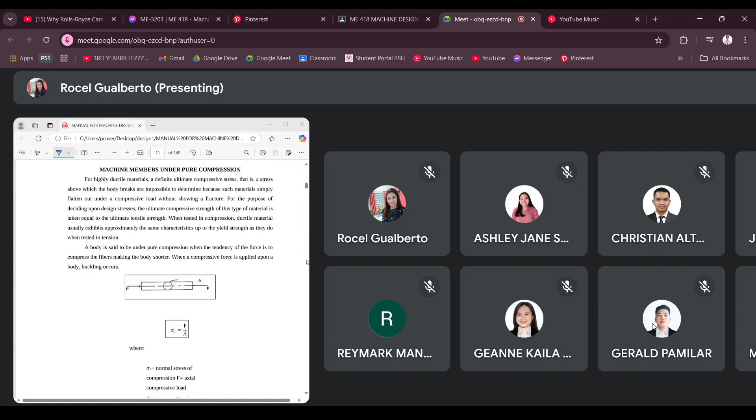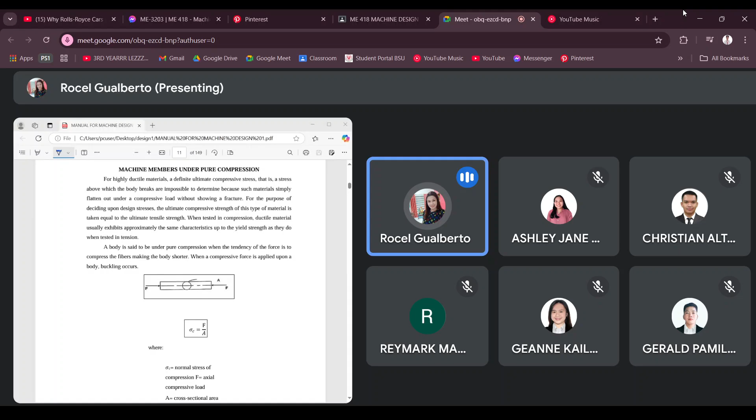Okay, so let us start with this one. So this time we are to design a member under a pure compression. So, kabaliktaran lang po ito nung sa tension. So, if you have there a compressive load, that tends to push your material. Yung una po, it tends to pull your material, resulting to an elongation. This time naman, ipupush po natin. So, what is basically the difference between designing this member kumpara doon sa nauna natin na topic?

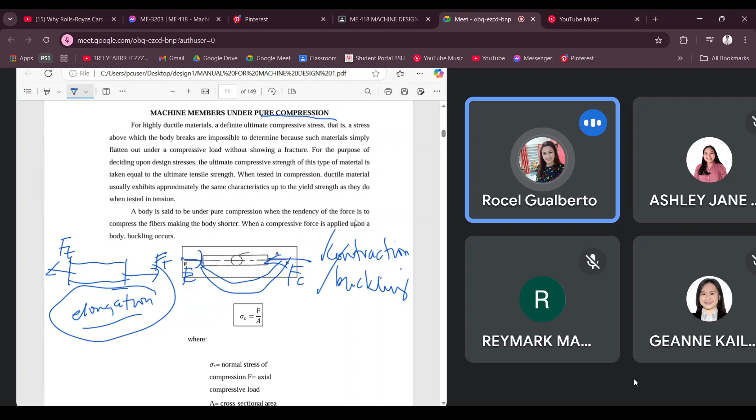Okay, so para malaman yon, you have here the criteria for design. The criteria for design is L divided by K and we call that the slenderness ratio. L is the original length of the material or the specimen. And the value of K is simply the square root of I over the area. I is the moment of inertia and A pertains to the cross-sectional area. So you have to derive the value of K, the least radius of gyration, coming from this equation.

Say for example, you have there a round or circular cross-section. For a circular cross-section, I is equal to pi d to the fourth divided by 64, and A pertains to pi d squared over 4. So these are the values of I and A. So kindly recall po yung mga value ng I. Yan po ay na-discuss during your MDB, Mechanics of Deformable Bodies.

So you try to recall po ano ba yung values ng I, moment of inertia. Ito po yung value natin. And having these values now, isa-substitute po natin sa equation ng K. K is equal to the square root of pi d to the fourth over 64 divided by pi d squared over 4. So, yan po yung ating equation.

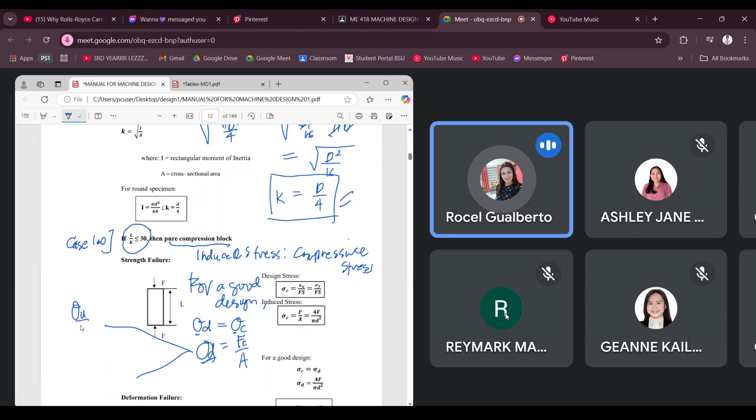What is the value of this design stress? The design stress can be written as sigma U over factor of safety, or it can also be sigma Y over factor of safety, depending upon the basis of design.

If the basis of design is the ultimate strength, that's the one to use. But if the basis of design is the yield strength, then we use sigma Y over factor of safety. That's what we'll use. You equate the design stress to the induced stress of the material.

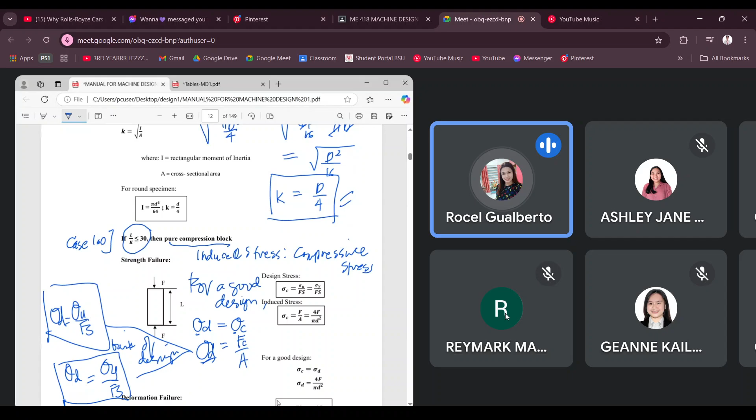So where is the dimension we're looking for? It could be on the area. If it's circular, then FC over pi d squared over 4 equal to your sigma d. So here is the dimension, here is what we need.

That is how you decide based on the strength failure, and that gives you the dimension. That is the strength failure. But then we also have what we call the deformation failure.

Now, how do we know if there's a deformation failure? You are given the allowable limit of deformation. For example, it's said that the member shall not contract more than this value. So the value given is called the allowable limit of deformation.

And what do we do when there's an allowable limit of deformation? For a good design, you equate the allowable limit of deformation to the computed value, which is FL over AE. This would be your FC. And then from the area, you solve for a dimension.

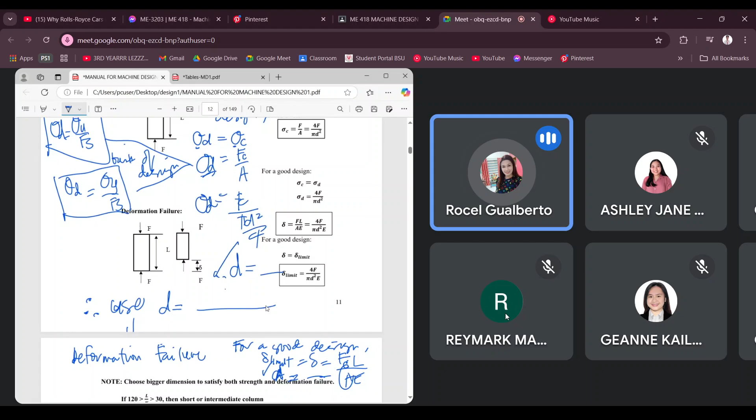So what would be your resulting dimension? You need to compare the diameter using the strength failure, and this is also a dimension considering the deformation failure. You need to look at both, solve both, but they won't be equal. Therefore, which one do you use? You use the diameter which is the higher or the highest.

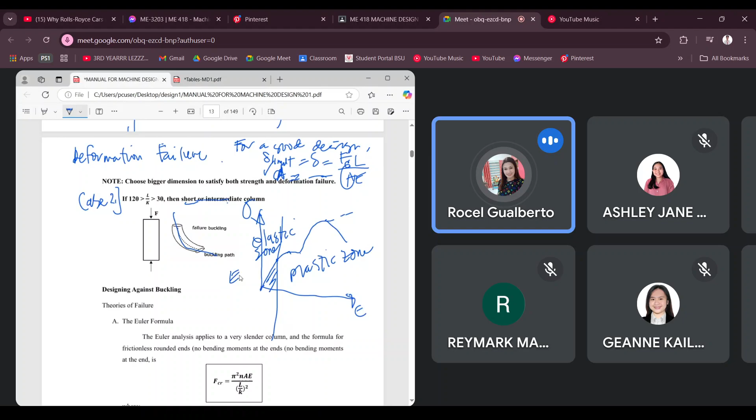In this elastic zone, this is governed by the Euler formula. Whereas the plastic zone is the opposite.

In the plastic zone, when you load the member with force, it will elongate. But once you remove the force used to compress it, it will not go back to its original dimension. It may recover slightly, but not totally eliminate all deformation like in the elastic zone. So in this part, we now have permanent deformation. That's the plastic zone.

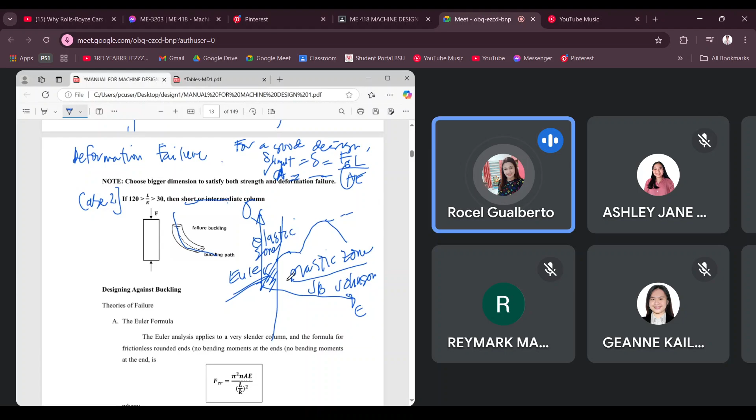As an example, the plastic zone is governed by the J.B. Johnson formula. So these two theories define the behavior of the material in the elastic and plastic zones.

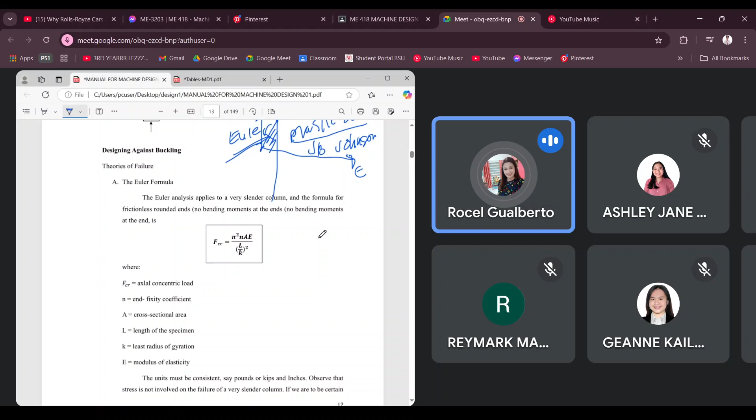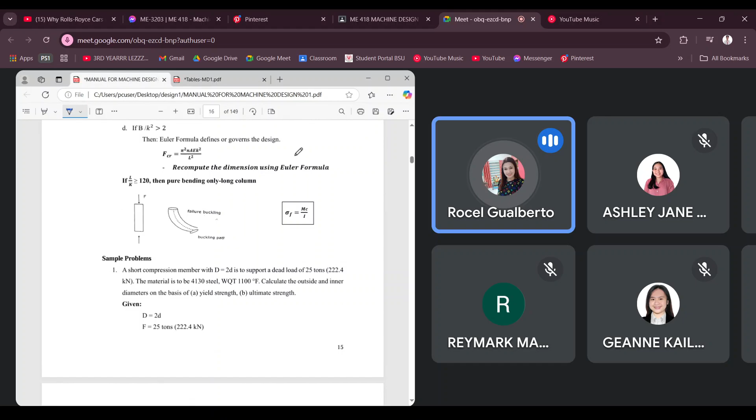Now, what are we going to design? Please look for the General Guide in Designing Buckling Failure, on page 15. So how is it stated? Compute the dimension by initially assuming that buckling failure occurs within the plastic zone.

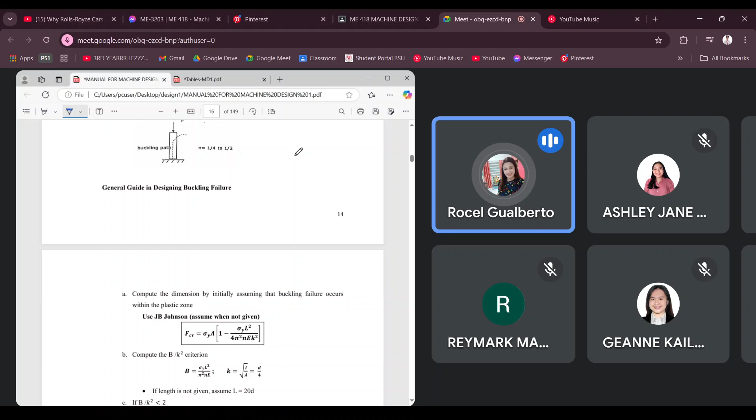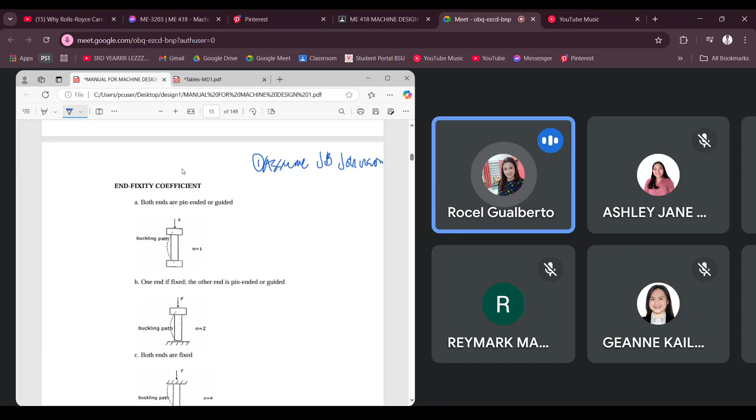So that's what you do first, to design: first assume to use J.B. Johnson. Assume that the member will use J.B. Johnson, meaning it would already have permanent deformation. That's our assumption — that the failure is in the plastic zone. So when you assume J.B. Johnson, that's why you use the J.B. Johnson formula.

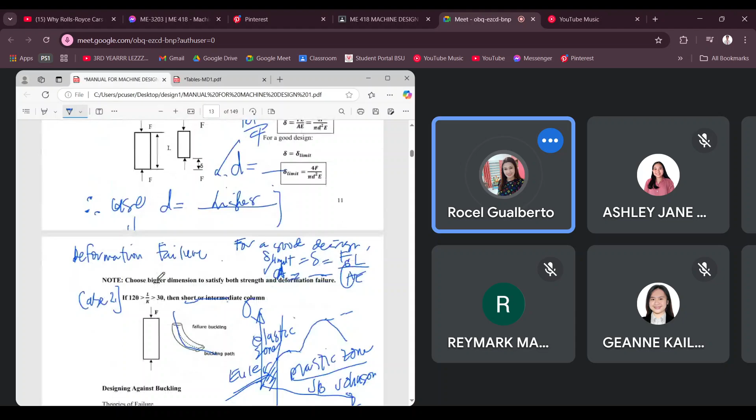F critical is equal to sigma y times A, times the quantity 1 minus sigma y L squared over 4 pi squared N E k squared. So this is our equation for the critical buckling load for J.B. Johnson.

So what do we need there? From this equation, you are able to solve for the dimension, which is in terms of the area. So that's where we get our dimension.

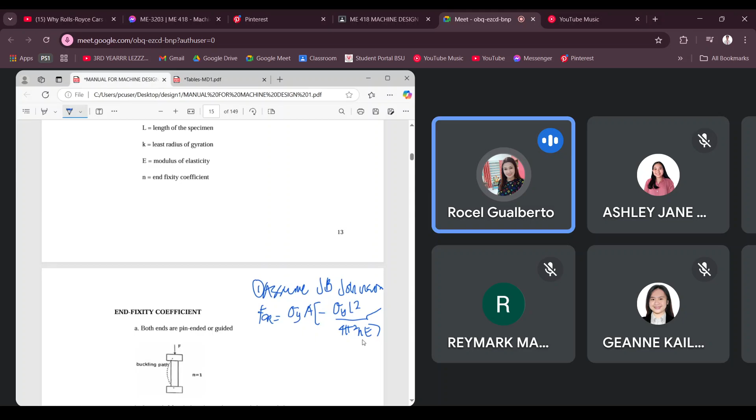Now, how do we solve this? Sigma y is taken from the table. As for the area, you can solve for that. You have length, which is also given. And then for pi, n, and e — e is called the modulus of elasticity.

And the n here is called the end fixity coefficient, and these are the values: n equal to 1, n equal to 2, n equal to 4, and n equal to 1, 3/4 to 5 over 12, or 1/4 to 1/2. So those are the values of n. We just choose depending on the conditions at both ends of the material.

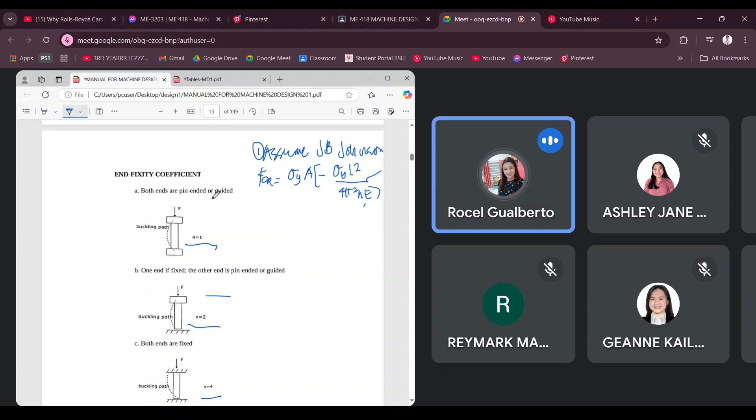So those are the values of n that we substitute into J.B. Johnson. You look at the buckling path, since its shape changes depending on the load we apply. So just look at the problem for what conditions of n are given. If none are given, you can assume both ends are pin-ended. That's how we get the value of n.

And e is the modulus of elasticity, which again comes from our table of properties. So the only thing left unknown is F critical.

Okay, so the critical buckling load, this is different po from FC. Yung pong ginamit natin sa case 1, that is FC po, that is the compressive load. Okay, pero ito po, FCR, tawag po dito is the critical buckling load. Buckling. Okay, so it's the critical buckling.

And to be solved using the equation FC times the factor of safety. Okay, so ganun mo po kukunin yung F critical. So using this equation, yung area po niyan, will make it simple, pi d squared over 4, kung siya ay circular. So galing sa equation na yon, you come up with ito lang: F critical equal to FC times the factor of safety.

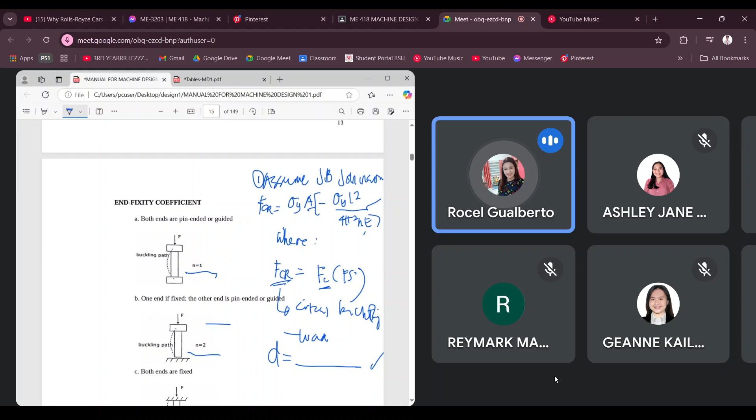So we started with an assumption using the JB Johnson. Tapos another assumption, ito gamit ni JB Johnson. Tapos we solve. So kailangan po yung nasagot po natin dito sa JB Johnson, kailangan po natin ma-check, kasi we simply started with an assumption. So paano ma-check kung tama? Ang ginagamit po natin is yung B over K squared criterion.

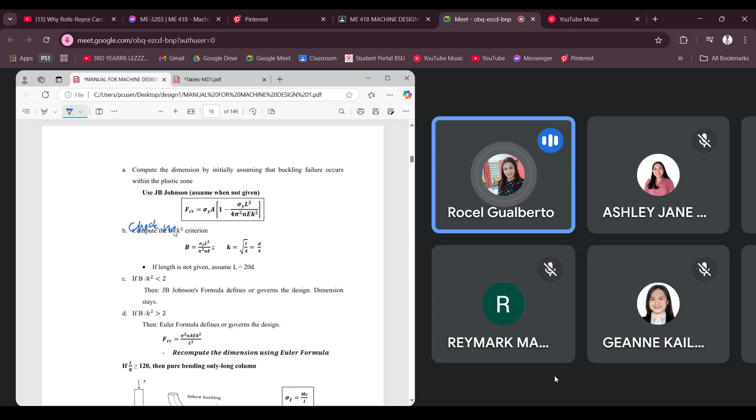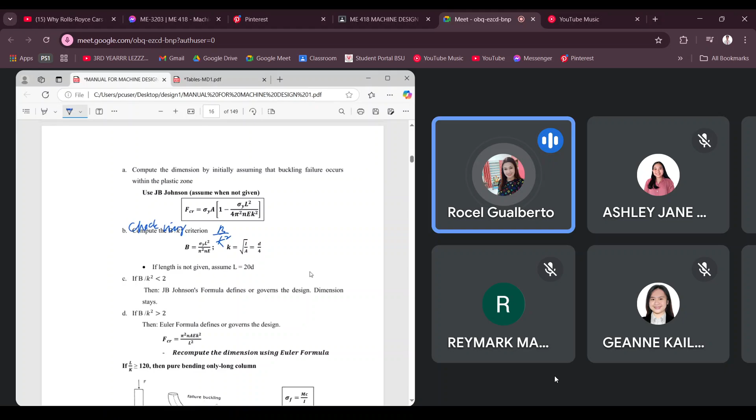Okay, so you have to check using B over K squared criterion. Okay, so yan po yung gagamitin natin na pang-check. So what is the value of B? Yung B po natin is equal to sigma y L squared over pi squared n E. And then you have there yung K, which is square root of I over A. So we have there K value, is equal to square root of I over the area.

And in case for a round specimen, as we have derived, you come up with D over 4, kung yan po ay round. So, ang gagawin nyo lang po, kung ano po yung mga values na ginamit po doon sa JB Johnson equation, yun din po ang ipapalit po natin. At yung pong na-solve po natin na diameter kanina, di po ba nag-solve tayo ng diameter or dimension using the JB Johnson?

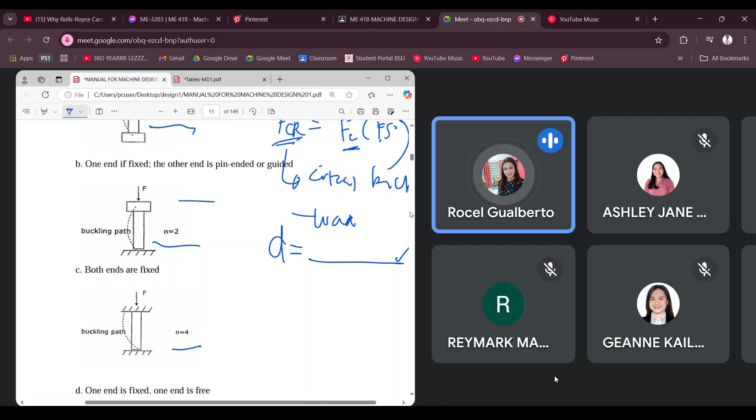Pag na-solve mo po yan, i-compare mo ngayon sa naging sagot po dito. What is then your value of the diameter? So what is your diameter? Galing po sa equation na ito. Now, yung diameter po na yan po yung isa-substitute dito. So, ibig sabihin makukuha mo po na B over K squared ay an exact value.

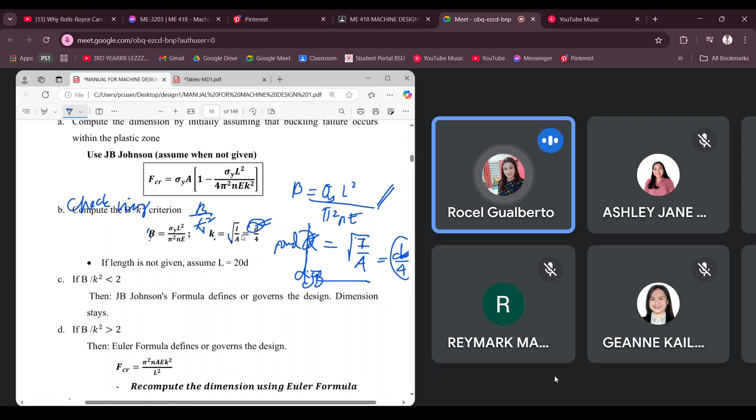Right? So, for example, yung sagot mo kanina using the JB Johnson, yun ang sa-substitute mo po dito. And then what would be the result? Ginagamit po ang B over K squared to test the value, to test your answer galing sa JB Johnson. So, ano yung mga pwedeng maging effect natin?

If B over K squared is less than 2, and the other one, if B over K squared is greater than 2. So, yan na po yung checking natin. Kapag po siya ay less than 2, then JB Johnson governs the design. Meaning, dimension stays. So, ibig sabihin yung sagot natin using the JB Johnson, tama po yun. This is our answer, kapag ang criterion B over K squared is less than 2.

But then, if B over K squared is greater than 2, then it would be Euler that governs the design. Meaning, ang failure po ay nasa elastic zone at wala sa plastic zone. So pag B over K squared ay greater than 2, ibig sabihin po yung sagot nyo using the JB Johnson, yun ay mali. So, mali po yun.

Ang gagawin mo ngayon ay magre-recompute ka. So, you need to recompute using the Euler formula. And this is the Euler formula: F critical is equal to pi squared N A E K squared over L squared.

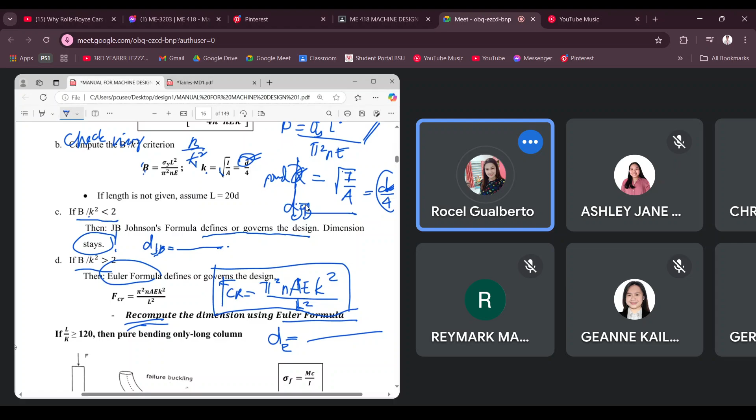Okay? And then the last one, we have here case 3. And, case 3 naman po if greater than 120. Okay, the slenderness ratio this time is greater than 120. Then we call it as a pure long column na po. Okay, and it experiences pure bending.

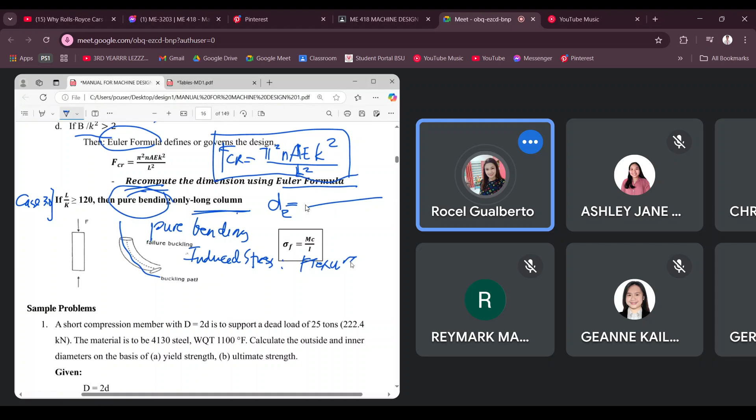And paano mo siya i-design? Okay, you equate. A good design, you equate the design stress with the induced stress, the flexural. The flexural stress, you have the equation Mc over I. Then, M pertains to the maximum moment. And then I is the moment of inertia.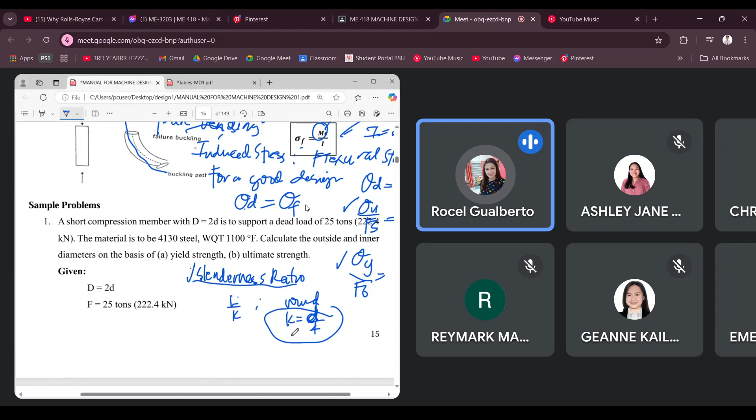So, you have your procedure on how to really design the compression member. Hindi dahil depende sa slenderness at hindi mo makuha ang slenderness, ay titigil na. So what is the procedure that you must apply? So anong gagawin mo? So you will start with an assumption. So ang una mong gagawin is to assume intermediate column. So yun po yung assumption. Assume intermediate column.

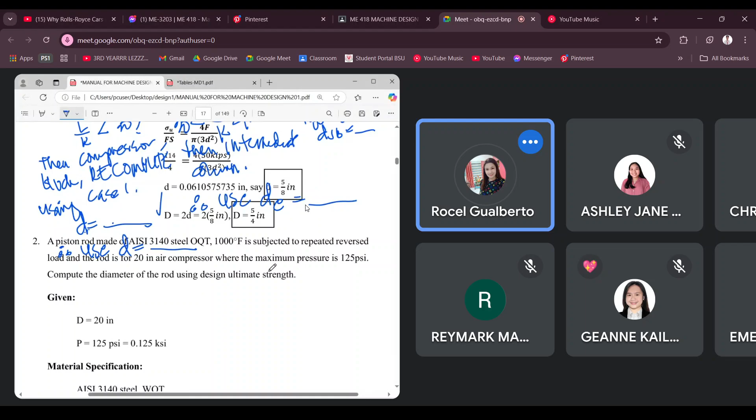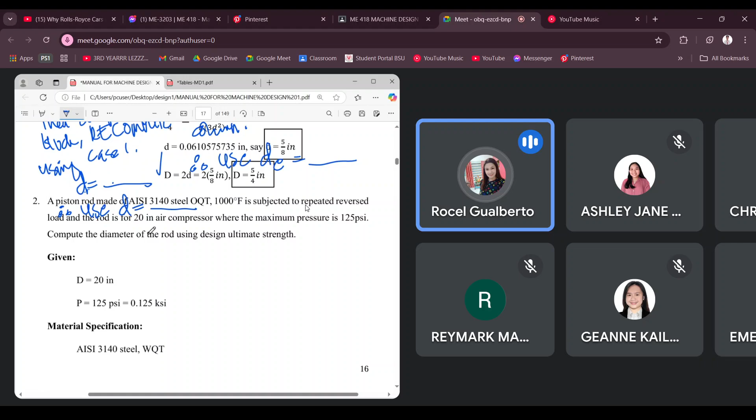Problem 2. Piston rod made of AISI 3140 steel OQT at 1000 degrees Fahrenheit is subjected to a repeated reverse load. And the rod is for a 20-inch air compressor where the maximum pressure is 125 psi. You compute the diameter of the rod using design ultimate strength. So, this is our illustration for the problem.

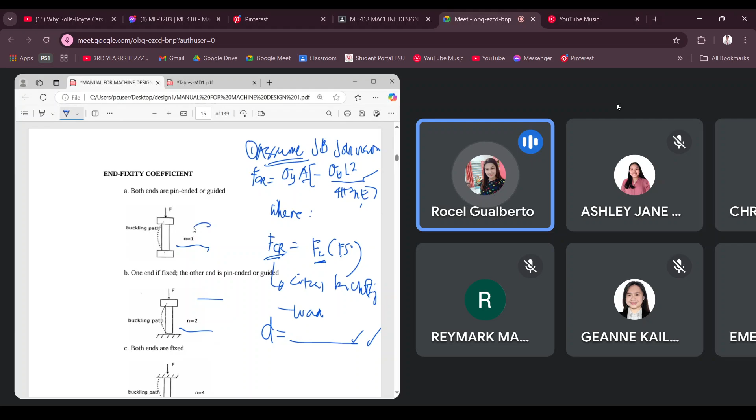Ano yung kulang? n, the end fixity coefficient. So, pili po tayo sa values ng n kanina. Kapag piston rod, yung taas po nakakabit dito sa piston, so it's pin-ended or guided. Yung ilalim naman niya, nakakabit po sa crankshaft, so nakapin din po siya doon sa baba. So both ends are pin-ended or guided, n equal to 1.

So, this is what we'll use, n equal to 1. Both ends are guided or pin-ended. N equal to 1. So, E, K, N equal to 1. So, what's left?

We've defined all of this, now for F critical. F critical is equal to FC times the factor of safety. The factor of safety equals 8. What about FC? FC is the compressive force. So, how do you solve for FC?

Sometimes that's given, but in this case you need to solve for it. Recall pressure: pressure is equal to force over area. That force is the compressive force, and this would be the area of the compressor. Therefore, FC would be the pressure multiplied by the area of the compressor.

This pressure is 125 PSI, area of the compressor is pi times diameter squared over 4. The given diameter of the cylinder is 20 inches. So, pi d squared over 4. What is the answer? Then convert that answer into KSI.

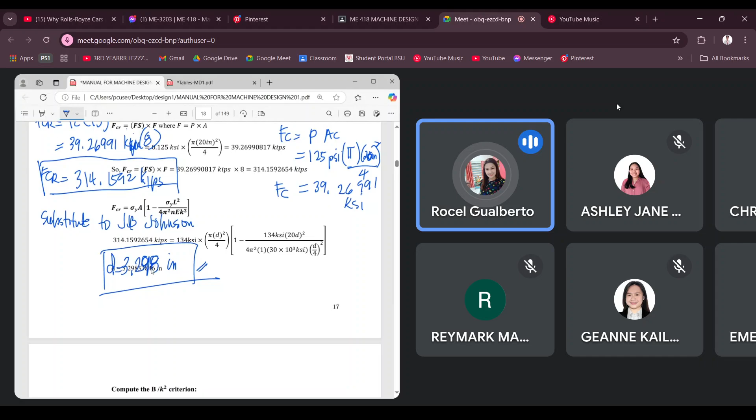Next, check that value, that answer. 3.298 inches, that's our answer using the JB Johnson. You need to check this. How do you check it? Check using...

...by computing the B over K squared criterion. The B equation is sigma y L squared over pi squared N E. You just input all the values. 134, what length? 20. What's our D?

3.298, that's the D. 20 D, you need to square this value. Divided by pi squared, N equal 1, 30 times 10 to the third. Common mistake: forgetting to square that, which causes errors.

Length assumption is 20 times the diameter, so that answer is also what you substitute. 20 times D, and the product is squared. So what would be the value of B? Likewise, K is D over 4. So this would be 3.298 divided by 4. So what would be the value of K?

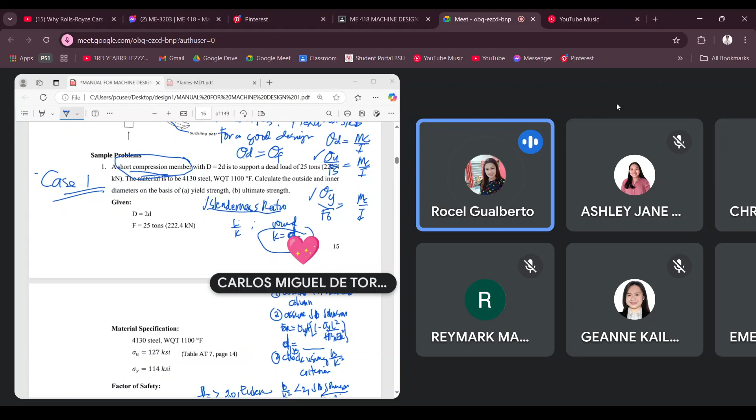So, I hope yung iba na-clear. Pero kung hindi po naka-specify, ang gagamitin po natin palagi, assumption first is case 1. And then you assume intermediate column and then case 1, and yun po yung procedure. So again, for compression, gagamitin muna ay slenderness. Tapos, you have the procedure for each of the cases ng slenderness natin.